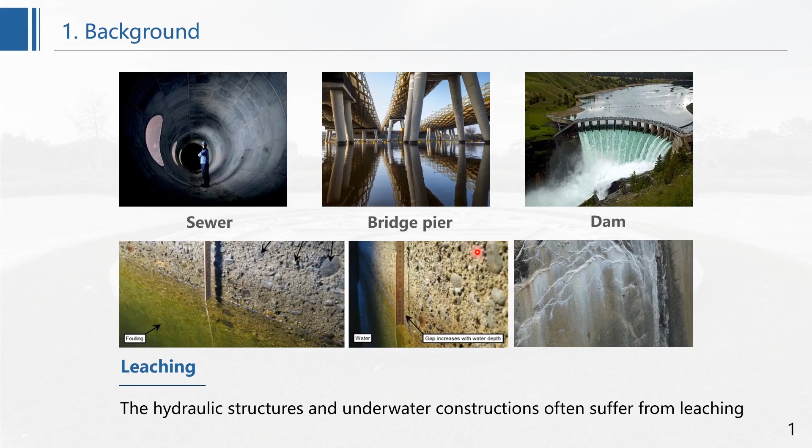As we all know, hydraulic structures and underwater constructions often suffer from leaching. The leaching of calcium from cement paste leads to the increase of porosity and loss of strength, in consequence affecting the long-term service performance of structures.

To understand the effect of leaching on cementitious materials, researchers have done a lot of work using various testing methods. Here are some commonly used methods. From the micro level, people use MIP or XCT to obtain the porosity of leached materials, and use EDS and XRD to see the chemical composition change of leached materials.

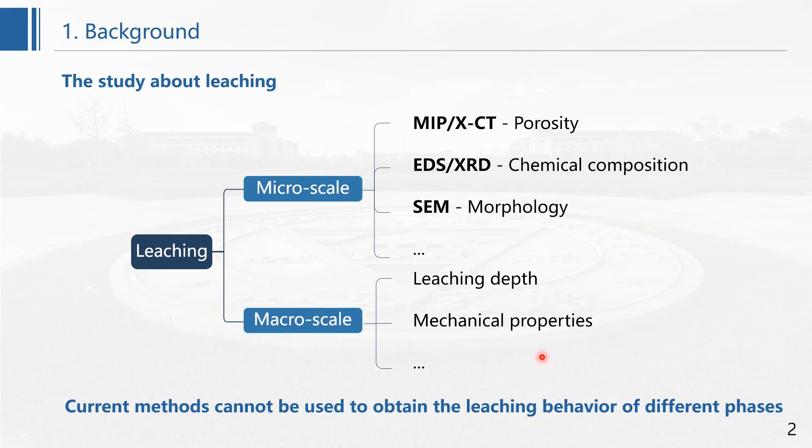From the macro scale, people usually try to obtain the leaching depths and the mechanical properties of leached material. However, current methods cannot be used to obtain the leaching behavior of different phases. As we all know, cement paste is a complicated mixture of unhydrated particles, portlandite, inner product, outer product, and aggregate.

The leaching of different phases in cementitious material is a gradual process which involves dissolution and transportation. It has been a challenge to accurately obtain the change of each phase during the leaching process. So far, there is still a lack of intuitive results about the changes of different phases after leaching.

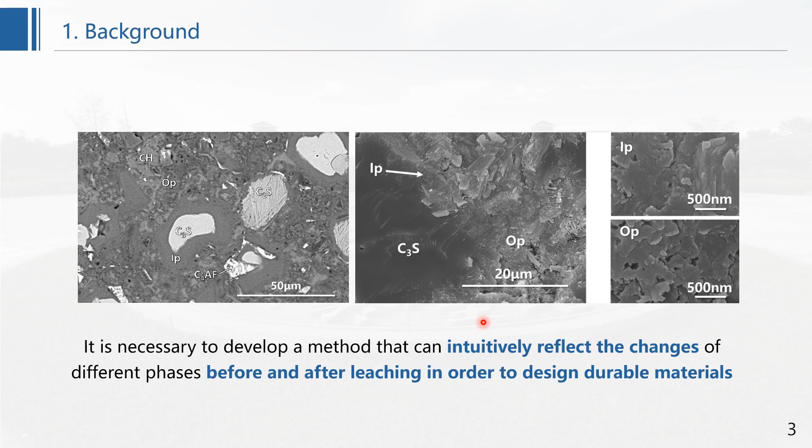Understanding the leaching behavior of individual phases is the basis of leaching study for cementitious materials, so it is very necessary to develop a method that can intuitively reflect the changes of different phases before and after leaching in order to design durable materials.

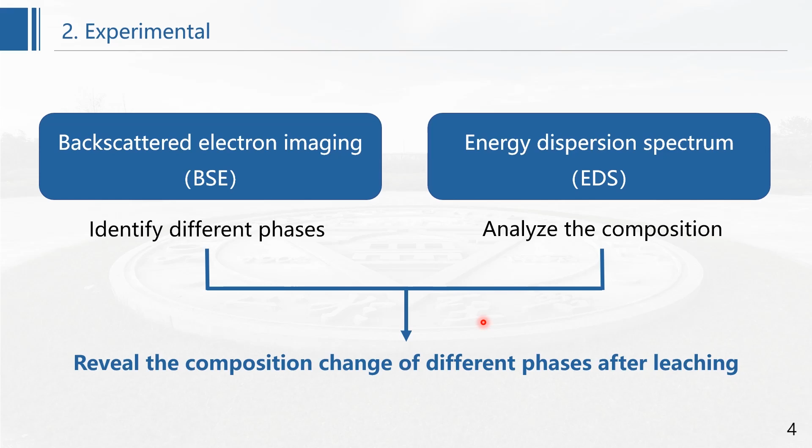As we all know, backscattered electron image analysis is a commonly used method which can be used to identify different phases in cementitious materials, and energy dispersive spectrum can be used to analyze the composition of different phases accurately. The combination of these two methods can be used to reveal the composition change of different phases after leaching.

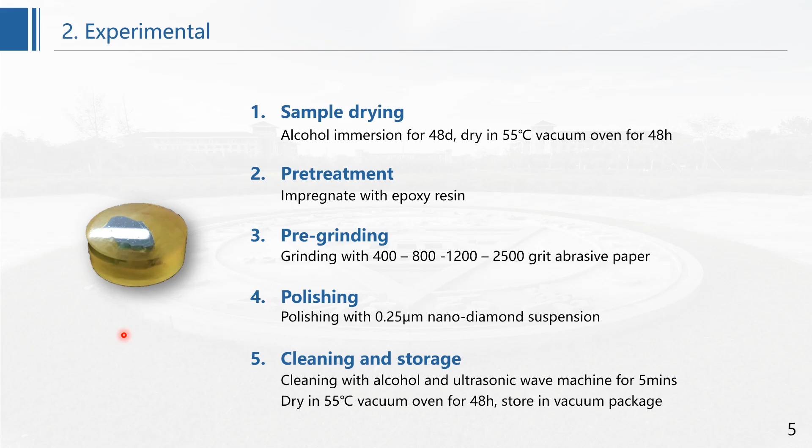Based on this, we propose a new method to in situ observe the leaching behavior of different phases in PC. In this investigation, we mainly use BSE to do the characterization, so we need to prepare samples for BSE test. We polish the sample following this process. Here is the in situ leaching observation method we used in our study.

Firstly, the surface of the sample before leaching is coated with carbon to enhance the conductivity. Then, certain areas containing representative phases are selected and marked on the BSE, and EDS is applied to analyze the composition of these phases. After the analysis, we use quick polishing to remove the carbon coating layer on the surface of the sample.

After the surface treatment, the sample is immersed into leaching solution for 3 days and then dried in the vacuum oven. After the drying process, the surface of the sample is coated with carbon again. Finally, we use BSE and EDS to in situ analyze the areas which have been selected and marked in step 2.

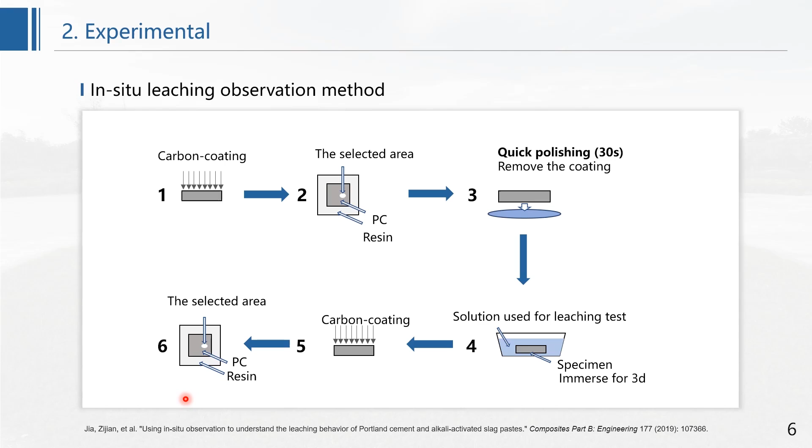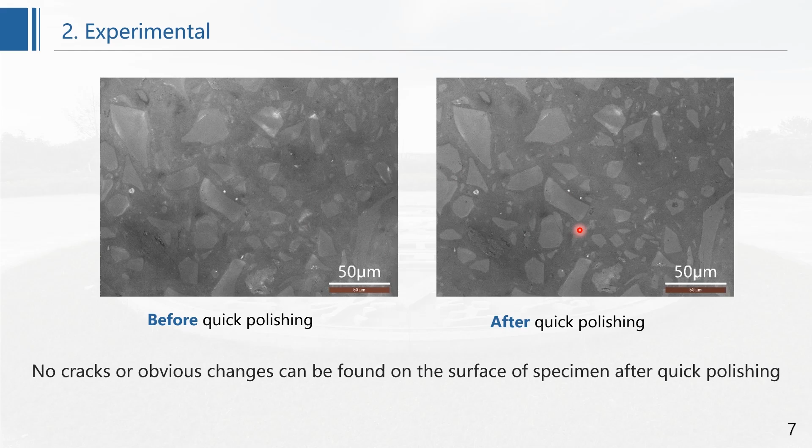Here are the BSE images of the surface of the sample before and after the quick polishing process. According to the images, no cracks or obvious changes can be found on the surface of the sample after quick polishing, which suggests that the quick polishing process has little effect on the surface of the sample.

Portland cement was used in this investigation. The water-to-binder ratio was 0.35. The sample chosen for the test was cured for 210 days. We used tap water for the mixing of cement paste and deionized water for the preparation of leaching solution.

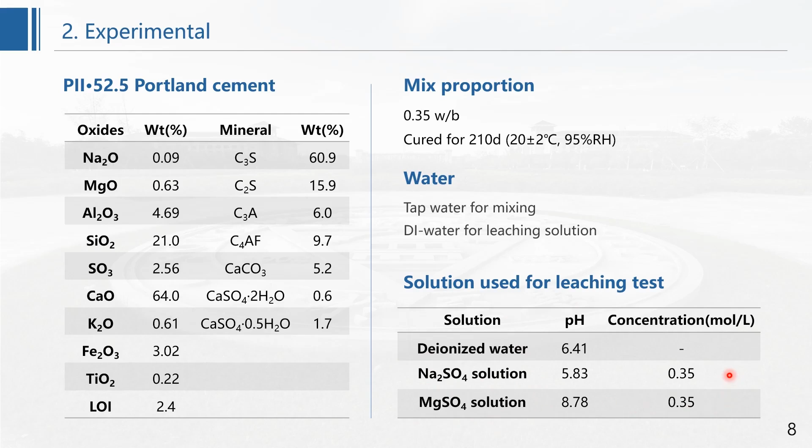In this study, we used three different solutions for the leaching test. They are deionized water, sodium sulfate solution, and magnesium sulfate solution. The concentrations of the sodium sulfate and the magnesium sulfate solutions are the same.

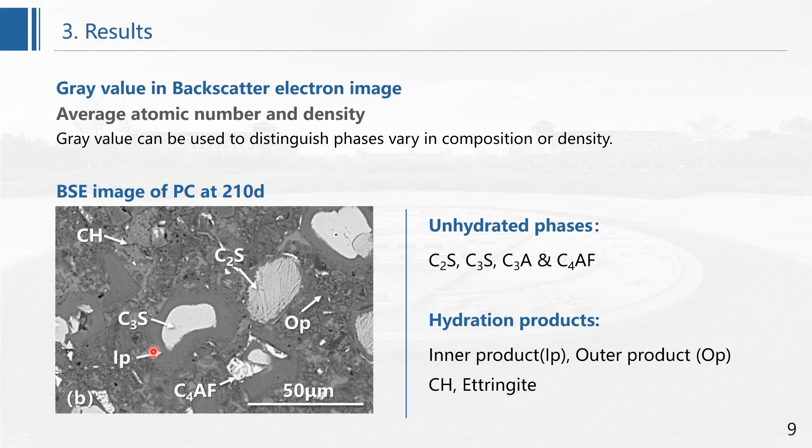As we all know, the gray value can be used to distinguish phases varying in composition or density. In this image, the hydration products and unhydrated particles can be clearly distinguished from each other. This facilitates our further investigation of the leaching behavior of different phases.

Firstly, let's see the leaching of PC in deionized water. Here are the BSE images of the same area before and after leaching. You can see that after leaching, the contrast and the gray value of the matrix decrease.

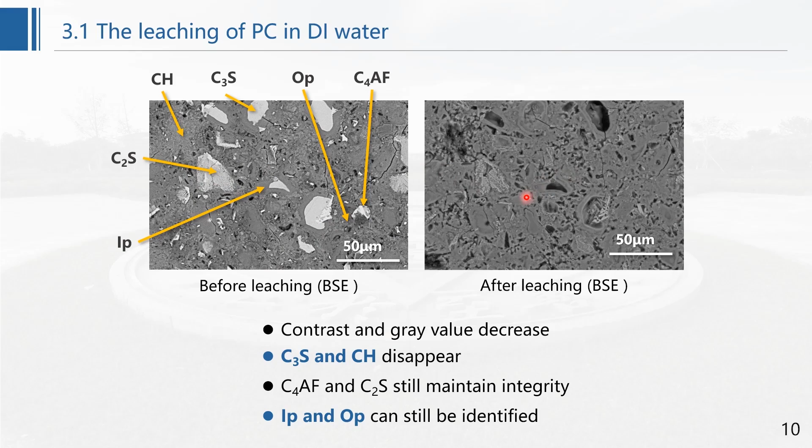C3S and CH, here the C3S, the CH, all disappear from the matrix, leaving holes in the matrix. C4AF and C2S still maintain integrity. Here is the C2S, here is the C4AF. They still maintain integrity. Inner product and outer product can still be identified in the matrix.

Here are EDS results of PC paste before and after leaching. We can see that after leaching, the relative content of calcium in inner product and outer product both decrease, while the relative content of aluminum and silica in inner product and outer product increase.

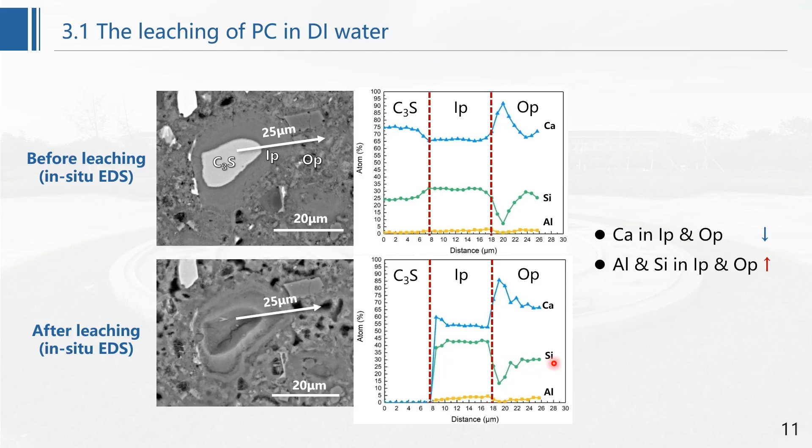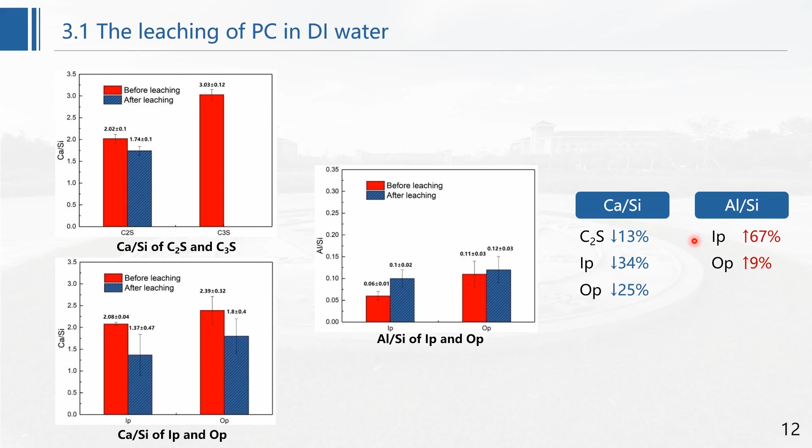Then we analyze the composition of different phases. We can see that after leaching, the calcium to silica ratio of C2S, inner product and outer product all decrease, while the aluminum to silica ratio of inner product and outer product increase, especially for inner product. The aluminum to silica ratio increased by 67%.

Here are the BSE images of PC before and after leaching in sodium sulfate solution. Here is the image before leaching, here is the image after leaching. The contrast and gray value of the BSE image decreased significantly after leaching. The C3S and C2S are totally eroded and left holes in the matrix.

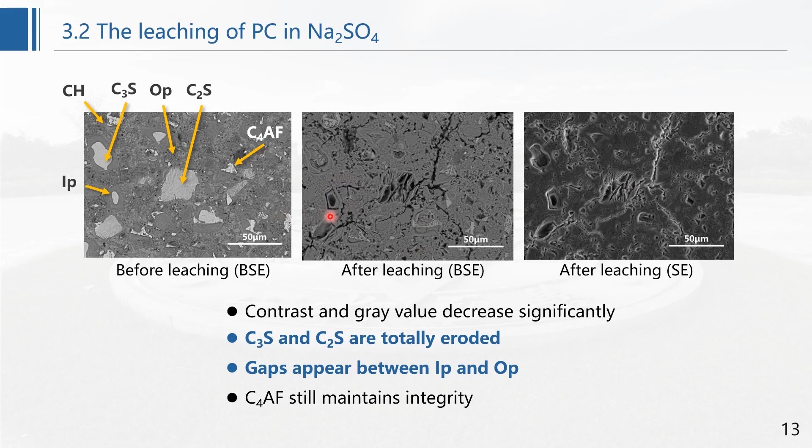It is worth noting that the layered structures here, the layered structures appear in the original position of C2S after leaching. Different from the phenomenon in deionized water, significant gaps can be found between inner product and outer product. C4AF still maintains integrity in the matrix.

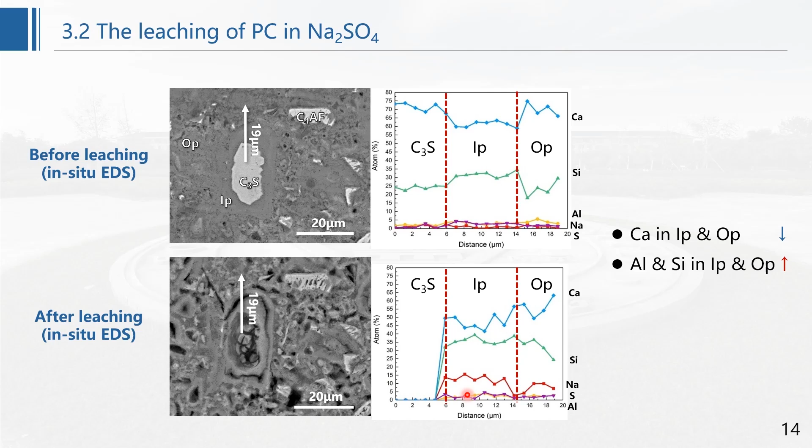Here are EDS results of PC paste before and after leaching in sodium sulfate. After leaching, the relative content of calcium in inner product and outer product both decrease, while the relative content of aluminum and silica in inner product and outer product both increase.

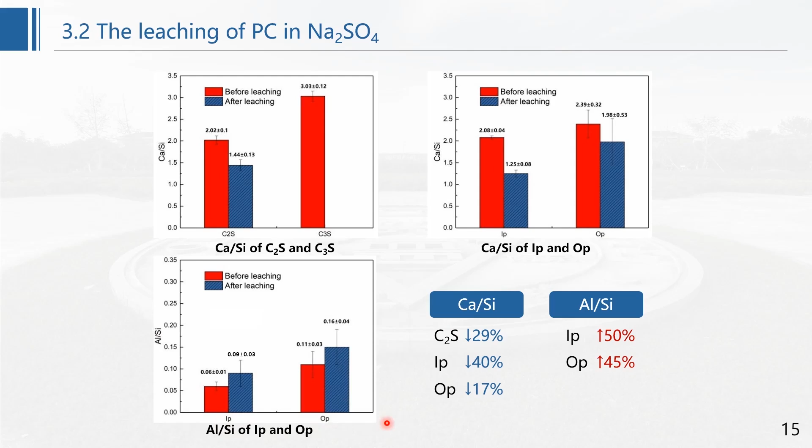Then we analyze the composition of different phases. After leaching, the calcium to silica ratio of C2S, inner product and outer product all decrease, while the aluminum to silica ratio of inner product and outer product both increase. This phenomenon is similar to that observed in deionized water.

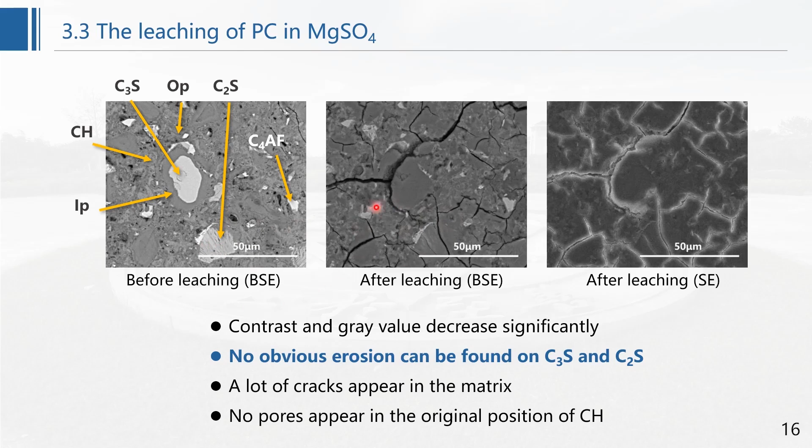Here are the BSE images of PC before and after leaching in magnesium sulfate. Here is the image before leaching and here is the image after leaching. We can see that after leaching, the contrast and gray value of the BSE image decreased significantly, which is more obvious than the previous groups. Different from that in deionized water and sodium sulfate, no obvious changes can be found on C3S and C2S. However, a lot of cracks appear in the matrix after leaching.

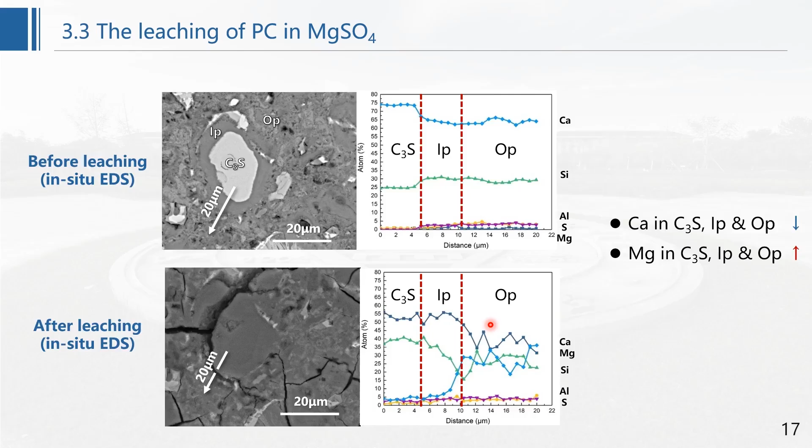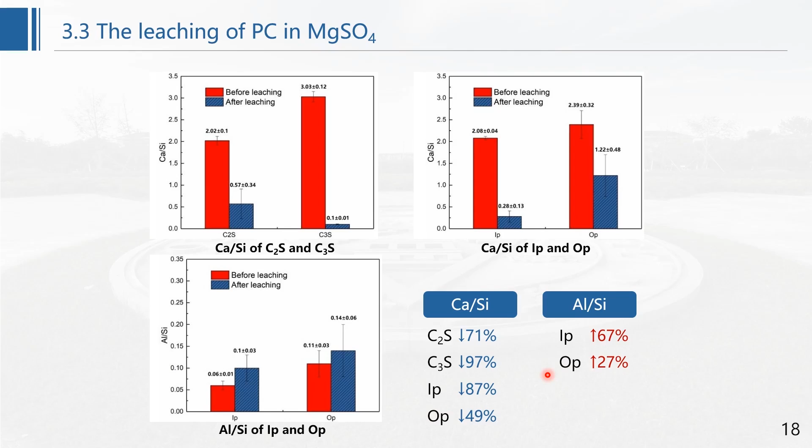After leaching, the calcium to silica ratio of C2S, C3S, inner product and outer product all decreased significantly, which is more obvious than that in deionized water and sodium sulfate. The aluminum to silica ratio of inner product and outer product also increase, indicating that the dissolution of silica is faster than that of aluminum.

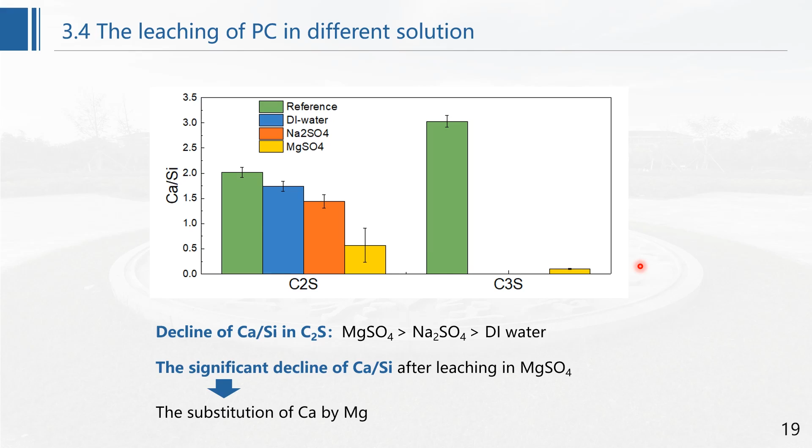Here is the change of calcium to silica ratio of C2S and C3S after leaching in different solutions. Among these three kinds of solution, the decline of calcium to silica ratio in magnesium sulfate solution is the highest. This should mainly be attributed to the substitution of calcium by magnesium during the leaching process.

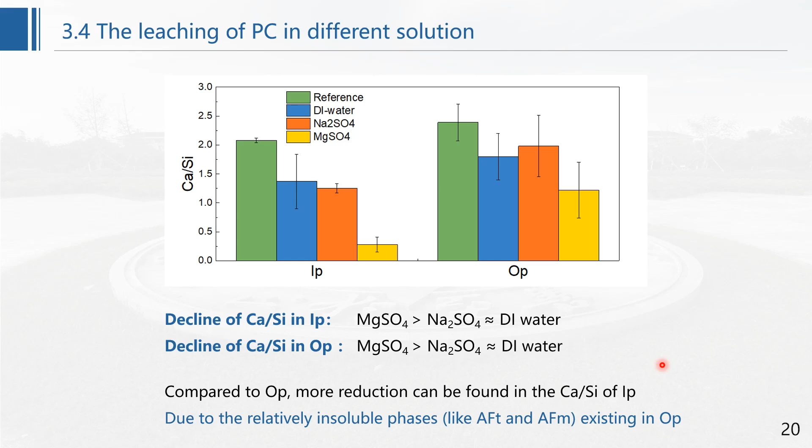Here is the change of calcium to silica ratio of inner product and outer product after leaching in different solutions. Similar to the results of unhydrated particles, the decline of calcium to silica ratio in magnesium sulfate solution is also the highest. Compared to outer product, more reduction of calcium to silica ratio can be found in inner product, which should be attributed to the existence of ettringite in outer product, which is relatively insoluble.

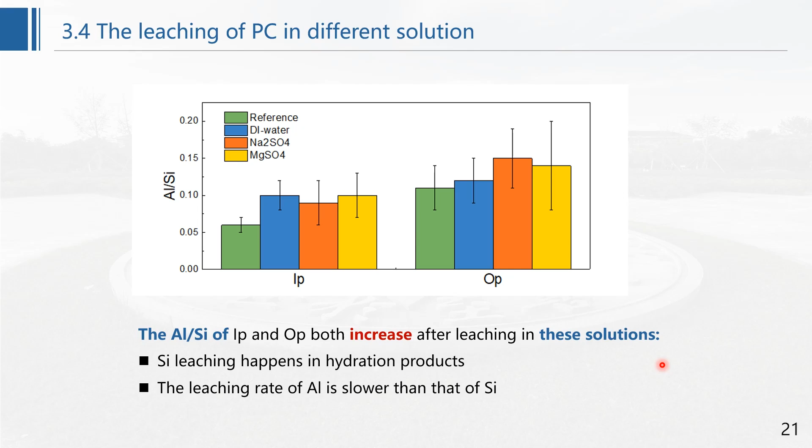Here is the change of aluminum to silica ratio of hydration products after leaching. After leaching, the aluminum to silica ratio of inner product and outer product both increase, which indicates that the leaching rate of aluminum is slower than that of silica.

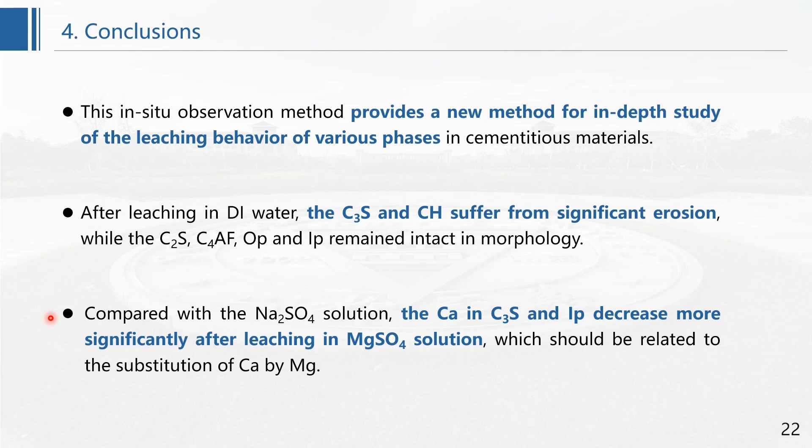Finally, compared with the sodium sulfate solution, the calcium in C3S and inner product decreased more significantly after leaching in magnesium sulfate solution, which should be related to the substitution of calcium by magnesium. That's all about my presentation.